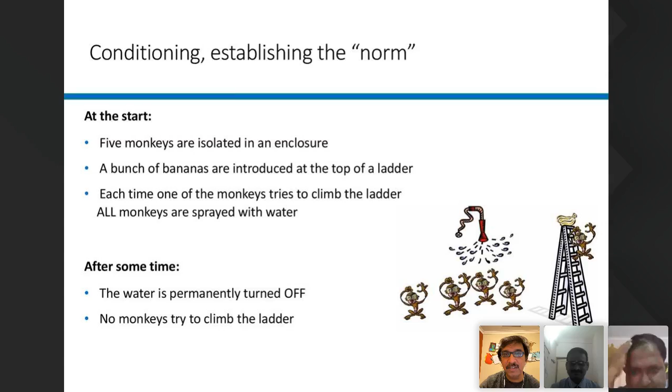They established the norm. After some time, they completely stopped the water spray, and no monkeys tried to climb the ladder, because they had a norm that if I climb, I'll be sprayed with cold water. Then proliferation. Proliferation is rapidly expanding the norm. So what happened? They replaced one of the monkeys with a new monkey. The new monkey tried to climb the ladder to get the banana.

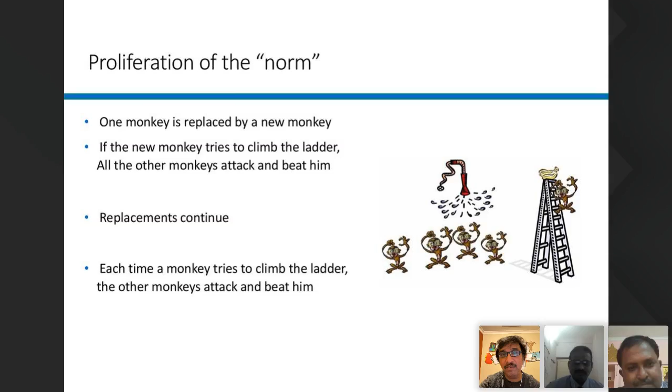All the other old monkeys attacked and beat him up. So the replacement continues—they replace the second monkey with a new one, the third monkey with a new one, and the fourth monkey with a new one. The replacement continues, and at some point all 5 old monkeys have been replaced with new monkeys.

Whenever a new monkey tried to climb the ladder, the old monkeys would attack and beat him. So what is the result of following the norm? Like this, the norm was set and the norm was expanded.

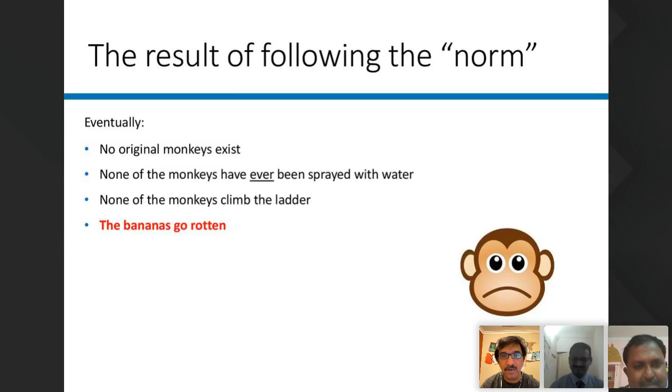And what if you keep following the norm? None of the original monkeys which had water sprayed onto them existed anymore—all were replaced. So the new monkeys were never sprayed with water, and none of the monkeys climbed the ladder, and the bananas go rotten, the bananas got spoiled.

So the message is, how do you avoid rotten bananas? See, we always fall into certain norms. We just get into our routines and we don't challenge ourselves. So if you don't want the banana to get rotten, always challenge the norm.

Always look for a better way, and most importantly, embrace new technologies and adopt a can-do attitude. In the industry, skill and knowledge is 30 to 40%, but what takes you forward is your attitude and your openness to embrace technologies.

In my father's generation, they start in one company and end up in the same company. That was the norm—people who are in their 60s and 70s now worked for one company throughout their life. In our generation, we switch companies every 2-3 years, move on. That's the norm now.

So the best thing to do is embrace new technologies, keep your mind open, have a good attitude, and prepare yourself for the future. That's the message I just wanted to share with everyone.

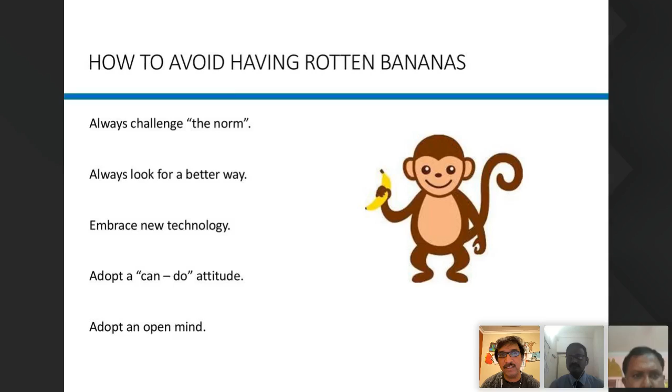And then we'll go to the overview of the oil and gas industry. I'm just using my iPad in parallel because it's connected to my mobile and the screen is a bit small, so apologize if I'm looking away from your screen.

Just a disclaimer, the oil and gas details discussed in this presentation are a very generic and simplified version. All the pictures and drawings are obtained from public domain web pages, personal collections, and from industry seminars.

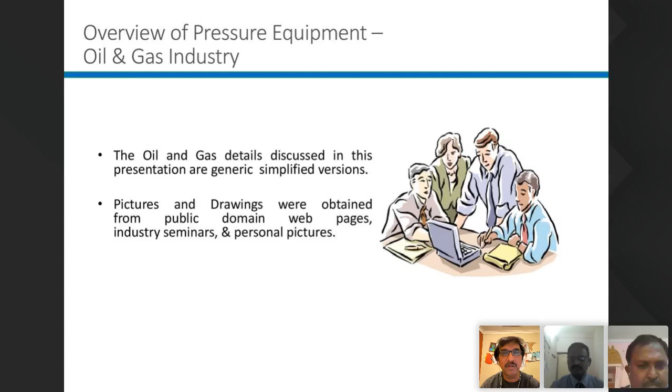I'm sure everyone is aware, you are all in the petroleum department, but I thought I'll just have a recap of what petroleum and natural gas are and how they are formed.

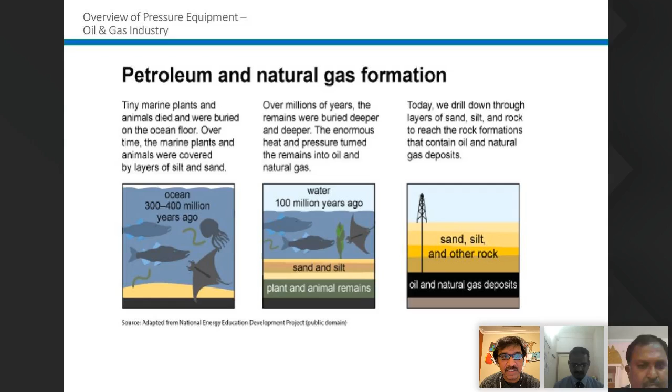Millions of years ago, tiny marine and animal matter died and got decomposed and buried deep inside the ocean. Over millions of years, sand, silt, and rock formed over the marine organisms. Due to pressure and heat from the overlying rock, the decomposed marine matter formed into gas—that's what we call fossil fuel. Today we drill through those layers of sand and silt and reach the rock formations and take out oil and gas.

What is the word petroleum? Petroleum is a Latin word—petra means rock, oleum means oil. Therefore it is called rock oil. Petroleum stands for oil from rock, or rock oil.

Petroleum is also often called hydrocarbon in any of its forms. We all know living matter is made up of hydrogen, carbon, oxygen, and nitrogen—majority 96%, with the rest 4% made up of smaller elements. So over the period of decomposition or decay, what remains of the fossil matter is 99% hydrogen and carbon. Those hydrogen and carbon atoms form a chain and become fossil fuel—that's why we call it hydrocarbon.

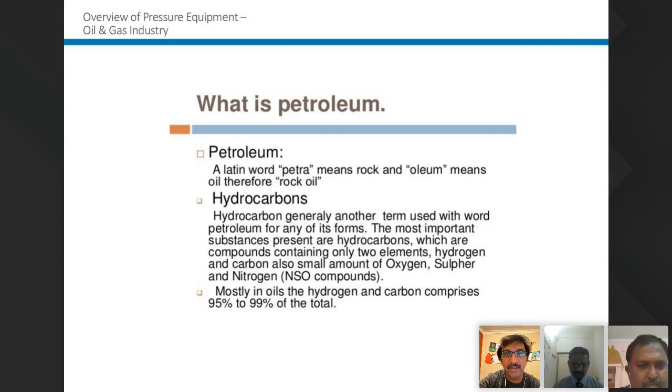Just a recap of what petroleum and hydrocarbon is. Then, oil and gas in our daily life—we use oil and gas to propel vehicles, heat buildings, and produce electricity. In the industrial sectors, petroleum is used to derive so many industrial compounds like plastics, polyurethane, and solvents.

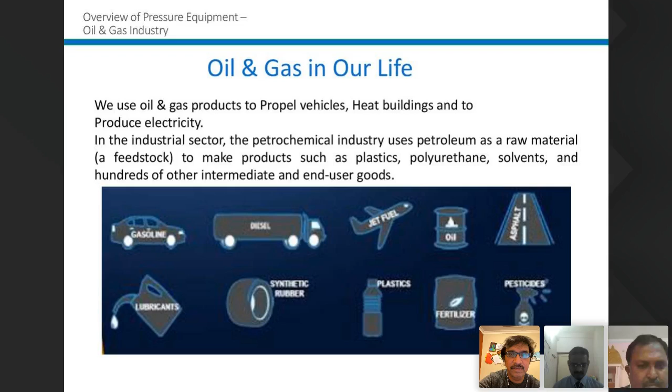Oil and gas characteristics: typically, oil and gas projects involve large investments, reaching billions of dollars. There is a project in Australia which we completed a few years ago.

It's spelled Gorgon—Gorgon, Gorgon. If you have time, please Google it. The cost of the project is $55 billion. It's the second most expensive project in the world, next to the International Space Station. So when you talk about investments, it's really large.

These are all called mega projects, mega oil and gas projects, LNG plants. A typical large project would cost around $8 to $12 billion from exploration to end of processing. Usually projects could be of scale $2 to $3 billion. So we're talking about billions of US dollars, 1 billion US dollars being 6,000 crores. And these projects are high risk in all aspects: people safety, environment, investment, and reputation.

I'm not sure how many of you are aware of the 2010 oil spill. In 2010, BP's platform in the Gulf of Mexico had a big explosion. One of the rigs exploded and caused a massive oil spill. It's the most disastrous event in oil and gas industry history. A movie has been made on that disaster, Deepwater Horizon. If you have time, please watch it, it's a very nice movie.

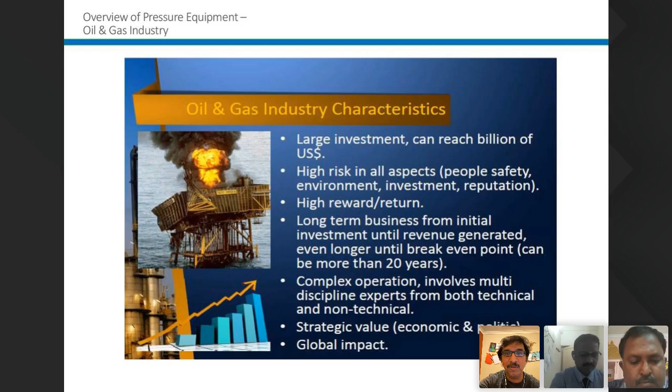I've got a small sketch of oil and gas industry sectors. Usually we divide the sector into 3 streams: upstream, midstream, and downstream. Upstream is about exploration and production - they use seismic technologies to figure out where the oil formation is, and they drill and bring the oil from subsurface to the top surface, or from the deep sea to the top of the sea. That industry has a small processing facility associated with it, and it's called the upstream industry - basically finding the oil and bringing it to the surface.

Then the second part of the industry is midstream. Not essentially every time is the oil field near a refinery plant - sometimes it's far away, like 70, 80 kilometers from the shore, or far away in a desert. So you'll have to bring that explored and produced oil for further processing to a refinery. If you see a picture of this sector, you'll see oil tankers that carry oil explored in the deep sea, say 100 kilometers from the shore, and bring it in tankers to the shore to download at a refinery for further processing. So that sector, transportation of oil from the place of exploration to the refining place, is called midstream industry - it's more of logistics, tankers and pipelines.

And the downstream industry is where the actual petroleum refining happens. This is where you get all the petroleum products, basically all the refineries, and further going downstream, you get a petrochemical industry or chemical industry. The end product is the petrol pump, where a common man gets access to petrol or diesel. This is an overview of the oil and gas industry.

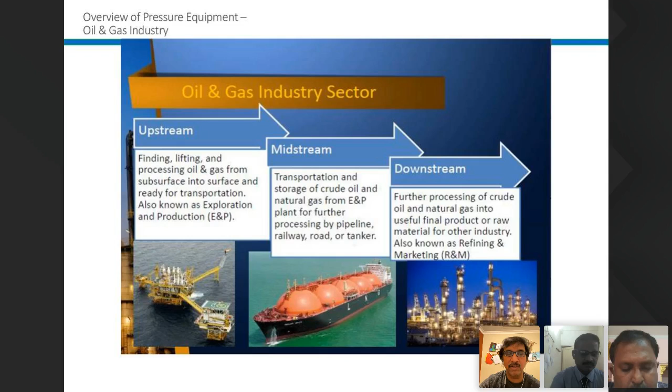Let's see how much oil is being consumed per day across the world - 98 million barrels is the consumption per day across the globe. I would say 45% of oil is consumed by America, China, India, and Japan. The rest, 55%, is consumed by all other countries put together.

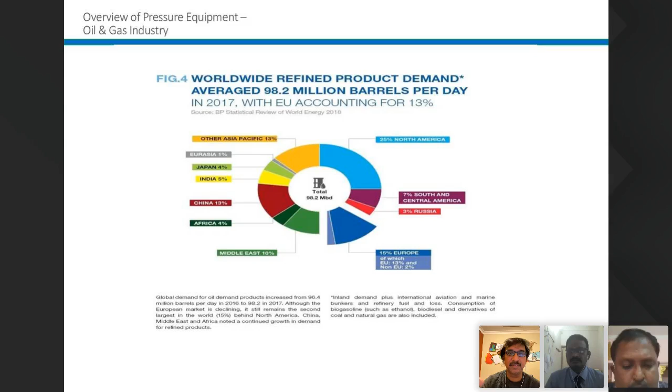Let's see who consumes the most oil. 42% of consumption of 98 million barrels is by light vehicles, that is cars and motorbikes, you and me driving across the roads. We are the major consumer of oil. 30% is by industries for electricity generation or other industrial purposes, and 20% is by trucks.

So you can imagine what COVID has done to the oil and gas industry. You would have heard oil price went negative because the 42% who drive were locked inside their rooms and nobody traveled on the road. So oil demand went so low and the price went down. We are the major consumer, light vehicles are the major consumer of the oil and gas industry.

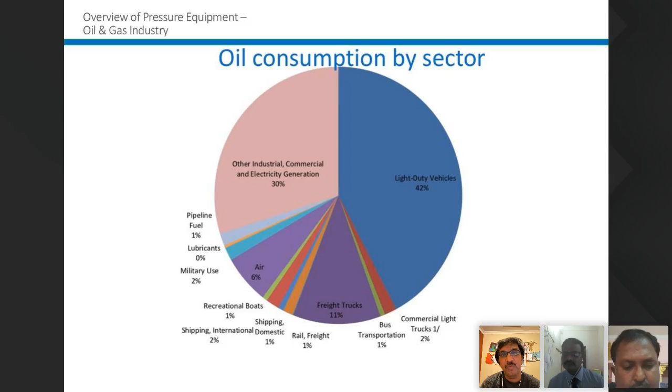The biggest companies in oil and gas, the number one company based on the 2019 report, is Sinopec, a Chinese company. Look at the revenue, it's $432 billion. That's the amount of revenue the big oil companies make.

They are all called IOC, integrated oil companies. They own upstream, midstream, and downstream. The major companies are Sinopec, Dutch Shell, you might have seen Shell petrol pumps, Saudi Aramco, BP, Exxon, Total, and Chevron. These are the major companies across the globe.

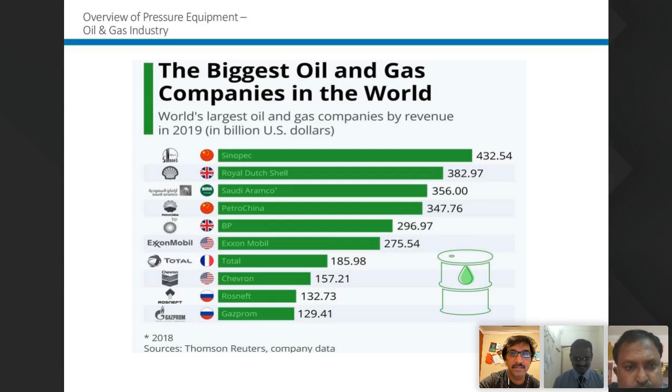Now I have a very simplified version of an oil and gas facility. I picked an upstream oil and gas separation unit, and this is a very basic schematic. On the leftmost side you see a production manifold, and the pressure coming in is around 200 bar. That's not the pressure in every case, it depends on the well pressure and temperature. For this instance, we've picked 200 bar and 100 degrees centigrade.

The production fluid, when you explore, comes as a three-phase oil, gas, and water mixture at 200 bar, 100 degrees centigrade, and it goes to the first equipment, called a production separator. This is where the gas, oil, and water mixture is separated into three different streams.

Let's take the oil line. At the end of the separator you see a thick black line going out marked as oil. When the three-phase mixture comes inside, because of density difference, and with special inlet devices, it separates into gas, oil, and water. Because of density difference, gas goes to the top, oil and water fall down. You'll see more detail in later slides.

I'm just quickly picking up the oil line. Oil first gets separated in the first phase separator and then goes to the low pressure separator again, which is a repeat of the first step. Further oil-gas separation happens there, and the oil is taken out. To transport crude over long distances, it has to be kept at a specified pressure and temperature, so you put it through a heat exchanger and then a pump to push it through long distances, and the oil goes out.

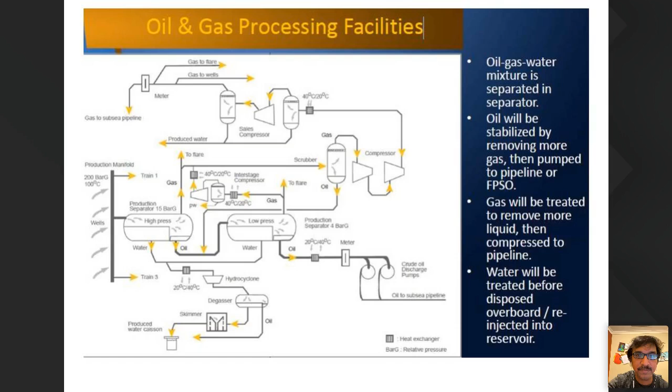Then, overview of pressure equipment. So what is pressure equipment and how does it look? Pressure equipment is a container. It is designed to hold gas or liquid at a pressure higher than atmospheric pressure. It has no moving parts inside. It's basically a cylinder designed to hold a pressure of, say, more than 1 bar gauge. Atmosphere is 1 bar, so anything stored at more than 1 bar gauge is called a pressure vessel.

It's a container basically, but it has a lot to do in terms of design, fabrication, inspection and testing. It can be of two orientations: one is vertical and the other is horizontal, basically flipping the way you support the equipment. A pressure vessel can theoretically be made in any shape, but industry usually limits it to a cylindrical shape. The cylinder is called the shell in industry terms, and the end caps are called heads. End caps come in spherical or elliptical shape.

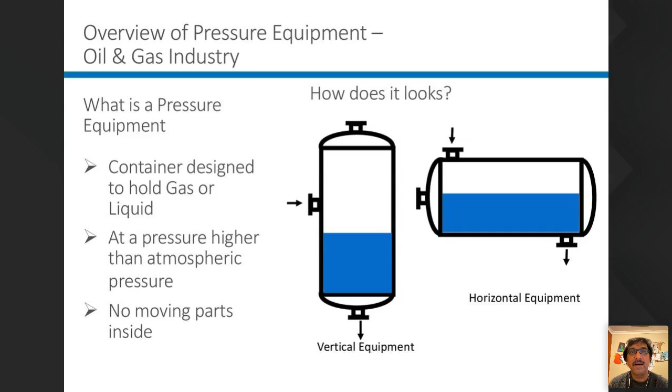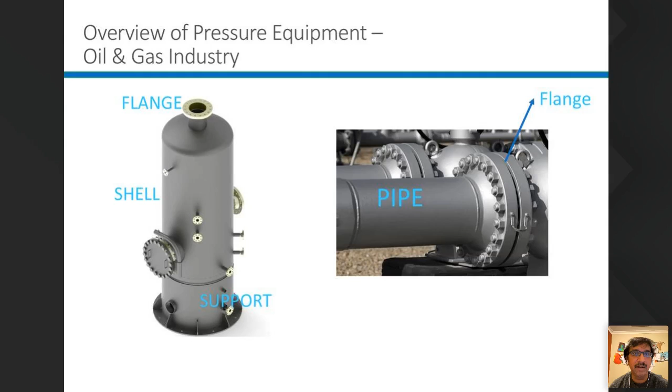Usually the pressure ranges from 1 or 2 to 300 or 400 bar, depending upon your well fluid inlet condition. And yeah, this is a very basic overview of pressure equipment. I thought I'd have a small 3D picture of a pressure vessel, the vertical one and the horizontal one. The fluid comes in and goes out through a pipe connection, and flanges, which are circular plates with bolt connections, are used to connect a pipe to your equipment, through which you transport liquid in and out of the vessel.

This is a sketch of a horizontal vessel. If you see the end side, it's called an elliptical head, 2:1, the ratio of the elliptical head. And those thick lines are all welds, which are used to attach the shell and head together.

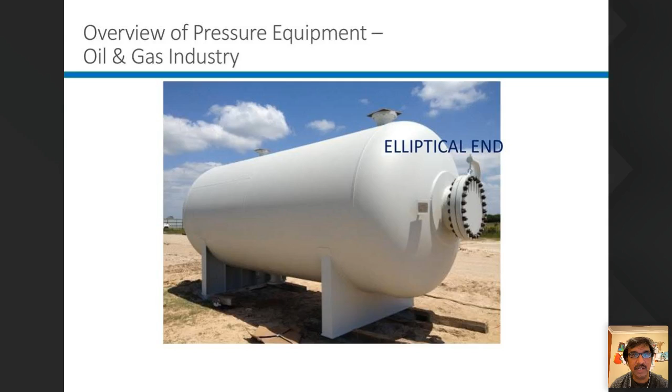So what's the significance of pressure equipment? The equipment operates at higher internal pressure. A lot of energy is stored inside the equipment. The higher the pressure inside and the bigger the size, the higher the stored energy. In the event of rupture or any failure, the extent of damage or disaster is huge. Pressure equipment safety is imperative in design.

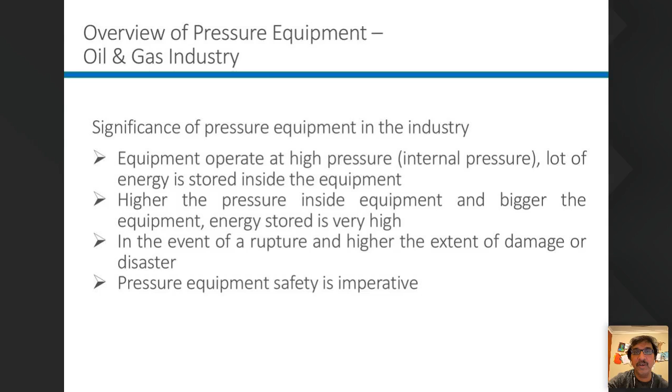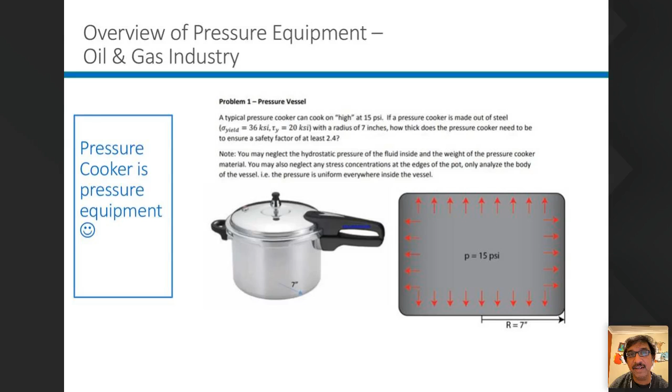Let's see this one, a small exercise. A pressure cooker is also pressure equipment. So how would you find the thickness of a pressure cooker which operates at 15 psig? In the industry, a pressure cooker cannot exceed 15 psig. That's the norm. So if you have to design a pressure cooker of 15 psig, with a plate material of 20,000 psi and a diameter of 14 inches, please give it a thought and see how you can design the plate thickness so that it can contain 15 psig pressure. We'll come back to this later.

We all think a pressure cooker is the simplest equipment, but home pressure cookers do explode. A woman in India was permanently blinded in her eye after a pressure cooker exploded. The full extent of injuries was not known until the CT scan was done. When they did the CT scan, they found that the valve, the one which pops out when pressure builds inside, had lodged deep inside her skull. She had to undergo surgery to remove it. Fortunately, she was saved, but she lost her eyesight.

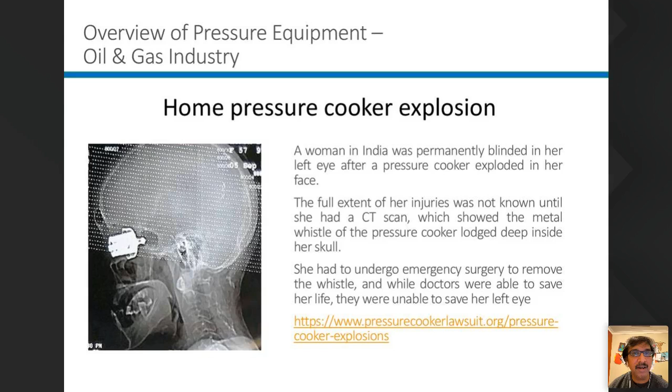If you go to the website link there, you will find many cases being launched against pressure cooker manufacturers across the globe. We are talking about a small cooker of 5 to 8 liters capacity with internal pressure less than 1 bar. So be aware, such low volume, low pressure equipment can cause a dangerous projectile. Then imagine what would happen with industrial equipment operating at 1 bar to 300 bar gauge with volumes of thousands of liters. It is a disaster if any of this equipment fails.

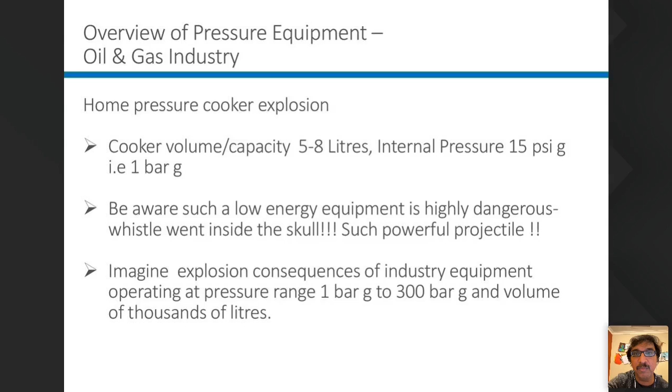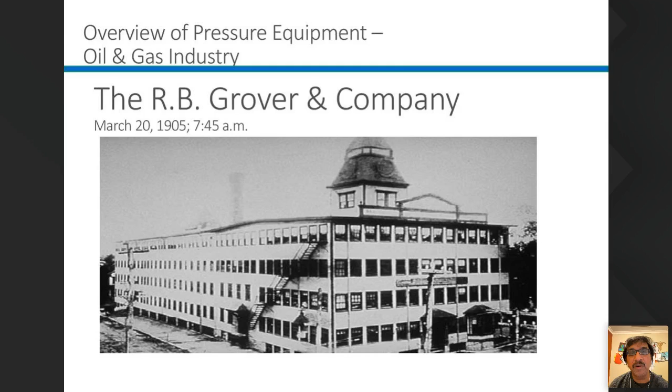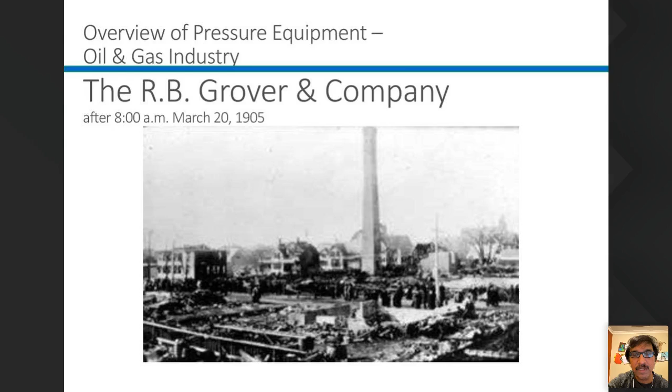Prior to this incident, all the pressure equipment, all the boilers were made based on individual skills of engineering assessment. They used to do their own engineering calculations. There were no regulations or guidelines for design of boilers. It was all finally up to the individuals, how they design and how they fabricate it.

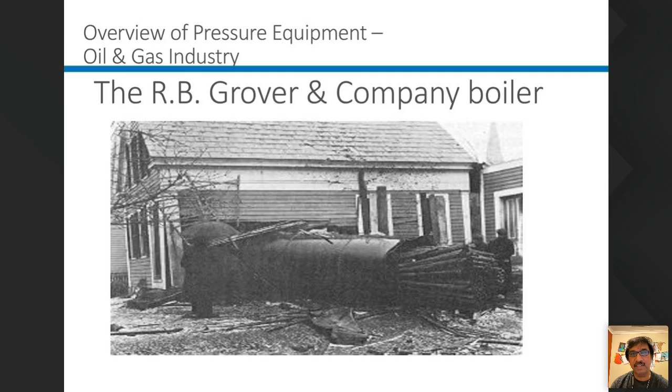So this incident really made a huge issue in the US, and they all recognized the need to have a proper code, code in the sense of a rule book, for the design of pressure vessels and boilers. So they approached ASME, the American Society of Mechanical Engineers, to come up with a set of guidelines. And I think in 1911 or 1912, ASME came up with a set of guidelines for the design of pressure vessels, unfired pressure vessels and boilers. That's how this ASME came into existence.

ASME is the book which we use in industry for the design of pressure vessels and nuclear plants. There are so many rule books in ASME. For unfired pressure vessels and boilers, we use Section 8, Division 1. Boiler explosions were common in the 1800s. Thousands were killed across years. This shoe factory incident was a major one that kicked off the requirement of uniform codes, and that's how ASME was created.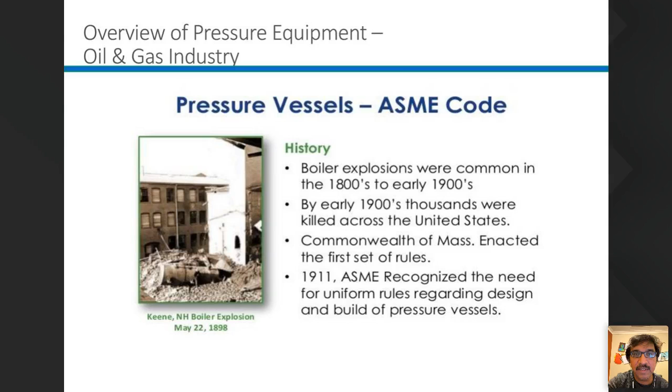So what does this ASME code define? They define the rules for design, materials, fabrication, inspection and testing requirements. It's a set of rules. The ASME code book for pressure vessels is over 1,000 pages. It's all defined rules. When we do a design, we simply follow the rules. There is no thought process or no questions asked, just follow the guidelines so that the equipment is delivered in a safe condition.

People have done a lot of research. They keep updating this ASME code once every 3 years or 2 years. So a big committee is working behind the scenes. On the industry side, we just follow the rules given in the ASME.

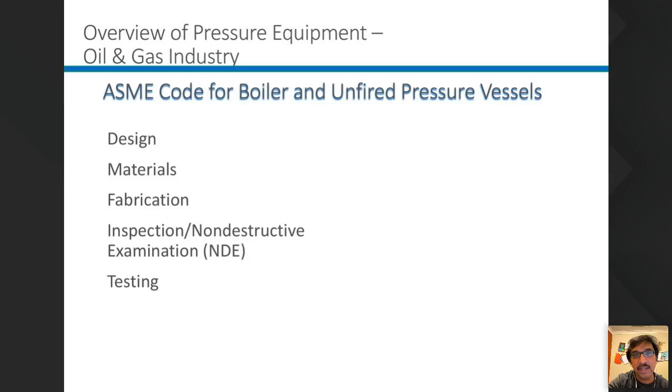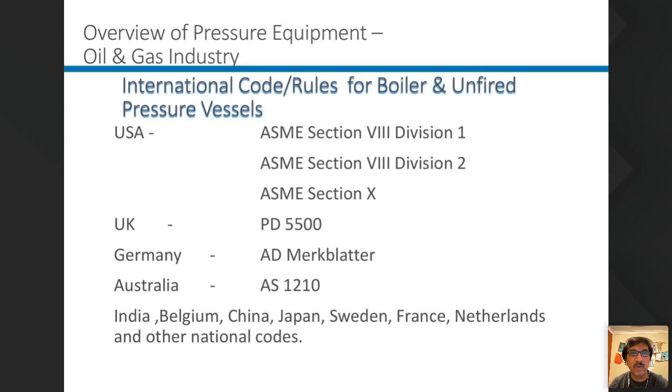So what are the international codes for boilers and unfired pressure vessels? In America, we follow ASME Section 8, Division 1 and Division 2. ASME has got multiple codes, but for pressure vessels and boilers, these are the two design codes which we follow. UK has got PD 5500, Germany AD Merkblatt, Australia we use AS 1210. Similarly, every country has their own pressure vessel design codes like Belgium, India, China, and Japan.

Vessel design. So we saw how disastrous a failure of pressure equipment can be, hence the need for the ASME guidelines. ASME made these design codes, and let's see what we do in the design of pressure equipment, what kind of loads we consider. Obviously, we have to design the equipment for the internal pressure, the pressure exerted by the fluid stored inside, and then external pressure.

When you drain the fluid from the vessel, sometimes it creates a vacuum, like when you take out water too fast from your water can, it pops in and out. That's okay with the water tank, but not with pressure equipment in the oil and gas industry. So you have to design for external pressure, self-weight, superimposed loads, and wind and earthquake loads. And more than that, fatigue, thermal design, and local loads from connected piping. Just have a brief idea of what design loads we consider.

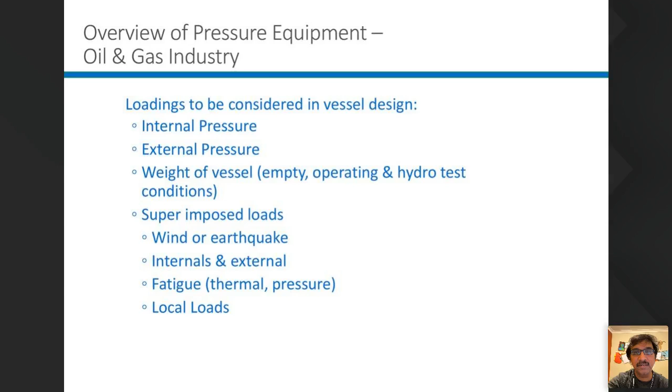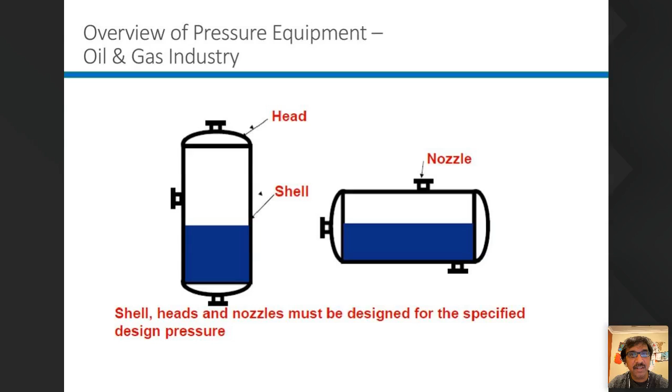And we saw this picture previously. The pressure components of pressure equipment are shell, head, and nozzle. These are the parts which are designed as per ASME. Let's take a small example. Let's take a cylinder of 48-inch ID. The intention is to find what the thickness of the cylinder should be if it has to withstand a pressure.

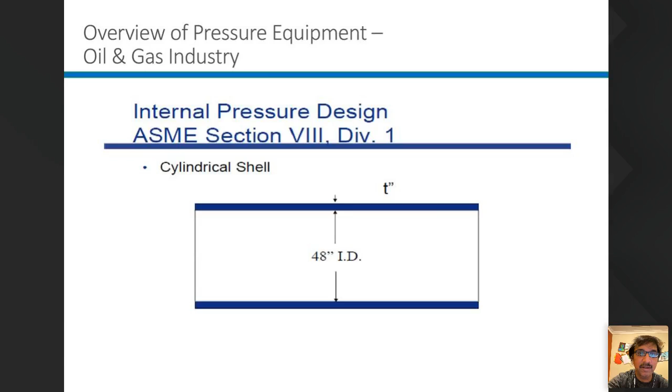And ASME gives this formula; UG-27 is the rule number. Just ignore that number. To find the thickness, the formula is T = PR / (SE - 0.6P) + CA. CA is corrosion allowance. As the fluid stays inside the container, it starts eating the material because of its corrosivity. So you always add some corrosion allowance, and 0.6P is a correction factor.

Leaving that out, T boils down to PR / SE. That's a very familiar formula. It's like hoop stress. Hoop stress is PD / 2T. So ASME has taken that PD / 2T and added a correction factor based on their analysis, and then added a corrosion allowance. So basically, the ASME formula is derived from hoop stress. Hoop stress acts on the cylinder's longitudinal joints, which see the most stress.

And if I go back to the previous slide, there is something called E. E is the joint efficiency. That's determined by what type of joint. Joint, in the sense like you roll a cylinder and weld it, right? So the welding might have some defects or it might have some porosity. So unless you do a complete thorough analysis of the weld, you'll have to add a safety factor in the design. That's what the joint efficiency is all about.

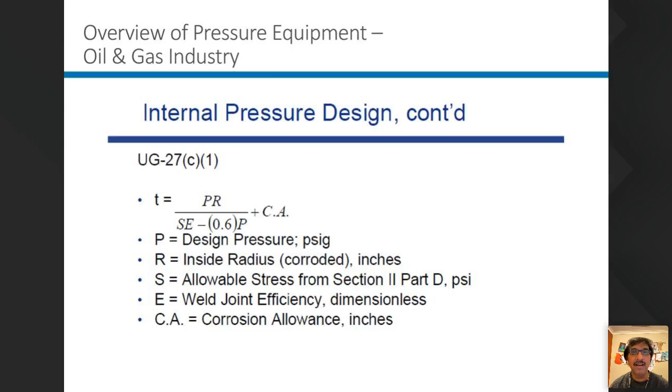After doing a welding, if you do a complete NDT and make sure 100% the welding is perfect, then E can be 1. If you don't do any NDT, then E can be 0.7. Basically, if the E goes low, 0.7, then the thickness goes high. Basically, they're building a margin in the thickness by lowering E values.

So let's take an example, work out shell thickness. The plate material is 516 grade 70. It's an industrial terminology for carbon steel plate with 70,000 psi ultimate strength. And if I consider 500 psi as an internal pressure and spot radiography, it means I do random radiography, then the thickness is calculated as PR over (SE minus 0.6P) plus CA. Just feeding in the numbers here, we get thickness as 0.8473 inch.

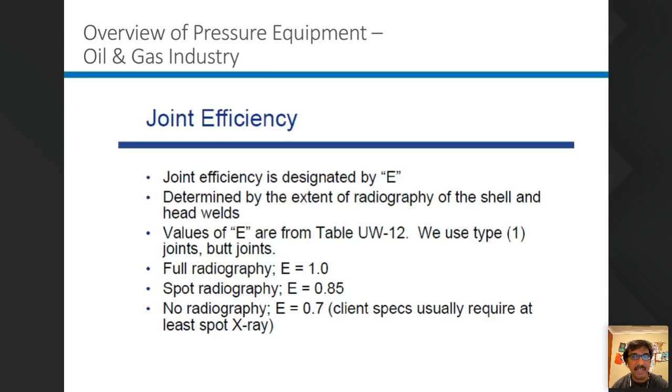So to contain a cylinder of 48 inch ID at 500 psig using a material of 70,000 ultimate strength, you need a plate thickness of 7/8 inch. So this is what we do in industry. When we get a project, when the client says, I want to design a production separator for 300 bar, a diameter of 3 meter by 8 meter length, we apply ASME formulas and calculate the thickness.

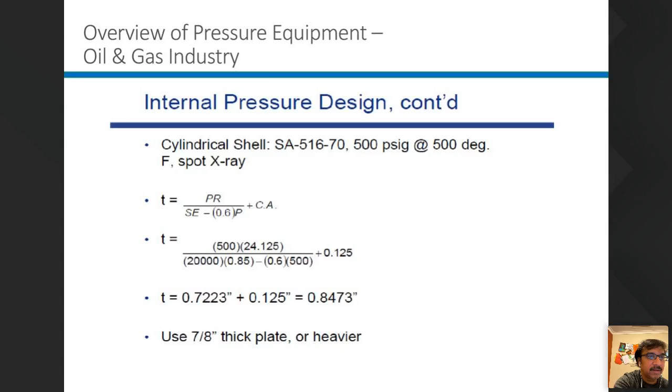And I'll quickly touch on the materials other than carbon steel. For the majority of material, the workhorse is carbon steel. Other than carbon steel, we use a lot of stainless steel: austenitic, ferritic, duplex stainless steel. The iron carbide diagram we study in college, this is the place where I find it applied largely. And also we use non-ferrous materials: aluminum, titanium, chrome nickel alloys. These are widely used industrial materials for pressure equipment.

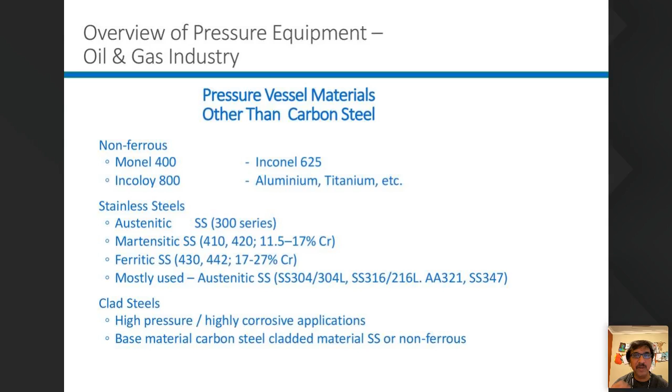And there is something called clad steel. This is basically a combination of carbon steel with an overlay of corrosion resistant alloy. It can be stainless steel or any other CRA material. These are the types of materials that we use in industry for fabrication of pressure equipment.

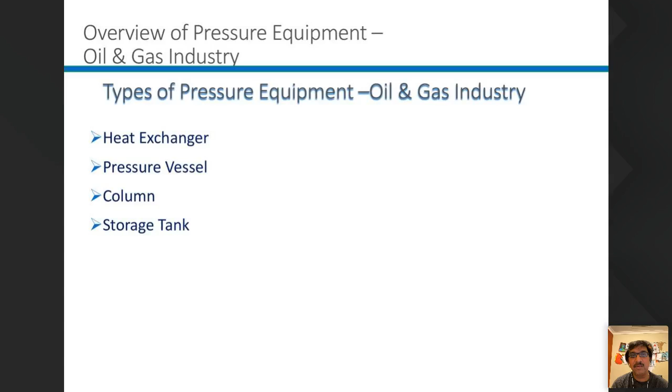And now, pressure equipment in the oil and gas industry. There are many types, but I just picked 4 majorly used types: heat exchangers, pressure vessels, columns, and storage tanks. Storage tank is not a pressure equipment, but I just included it because they're a group of equipment which are widely used. They do have a certain pressure, less than 1 bar, but technically they are not pressure equipment.

So what are the functions of this equipment? Heat exchanger is used to evaporate and condense. Basically, it's for heating and cooling. Pressure vessel can be a separator. Like previously we saw, an oil and gas mixture comes in, and a separator is used to separate the mixture into 3 different streams. Scrubber to knock off liquid in the gas stream. Filter, if you want to filter any debris that comes along with the well fluid, is again a pressure vessel, but it has specialty internals to filter.

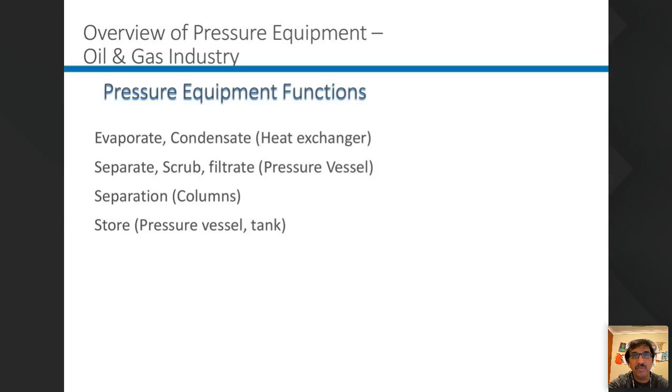And then columns, these are distillation columns. These also do a separation, but separation of products not by density difference, basically by boiling them and taking them out. And then the last is storage: pressure vessels and tanks. It simply stores, nothing much.

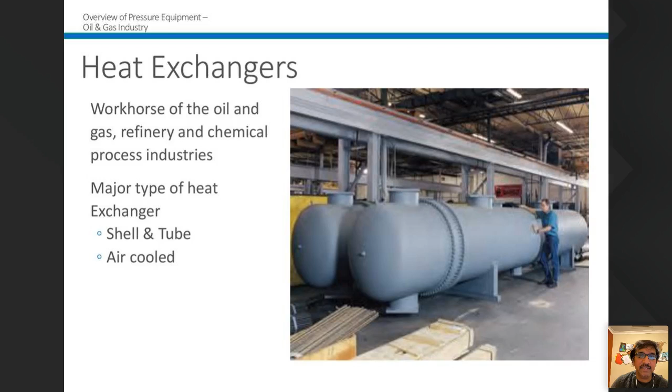Heat exchangers. They are the workhorse of refinery and the oil and gas industry. There are plenty of varieties of heat exchangers available in the industry. I'll just pick two of them: shell and tube and air-cooled exchanger. Again, a heat exchanger is also pressure equipment. The shell is designed to ASME code, or depending on location: if in US, ASME code, if in Australia, AS1210 code. Basically, it's a pressure equipment design.

In addition to that, we also have a couple of standards. API stands for American Petroleum Institute. They have a couple of standards, and TEMA, Tubular Exchanger Manufacturers Association. These are all standards used for design of heat exchangers. Basically these standards say how to design, select the material, fabricate, inspect, test, and ship the equipment. Basically, these are all guidelines used in the industry.

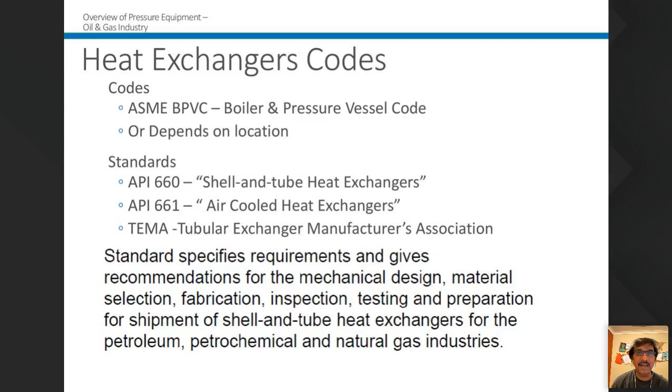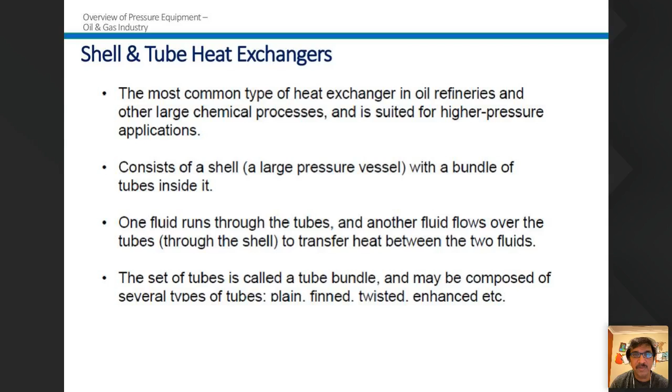What is a shell and tube exchanger like? It consists of a shell, a large pressure vessel with a bundle of tubes inside it. One fluid runs through the tubes, and the other fluid flows over the tubes, thereby exchanging heat between the two fluids. The set of tubes is called the tube bundle. There are many types of tubes, like twisted tubes, plain tubes, fin tubes. Most of the time, we use plain tubes.

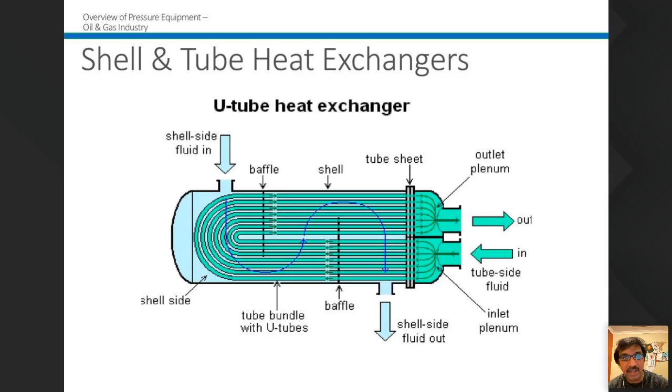Just a three-dimensional view of this similar sketch. I've got a video, let me see if I can play that.

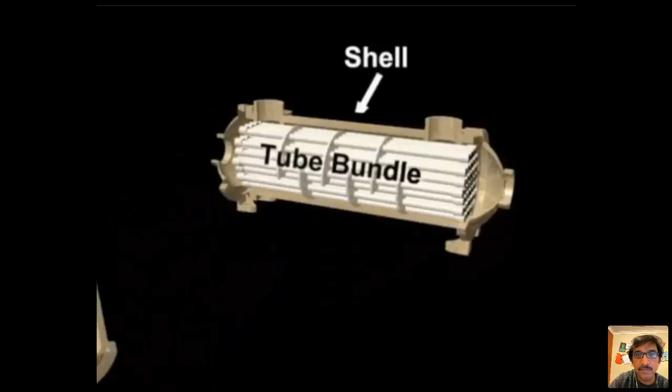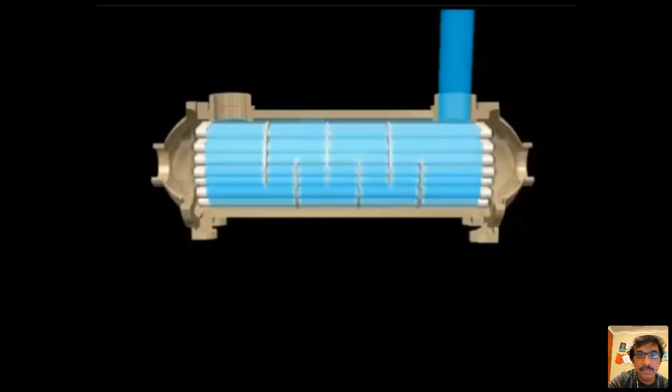A shell and tube heat exchanger consists of a bundle of tubes placed inside a larger tube, which is called the shell. The tube fluid, usually the process fluid, flows through the tubes in one direction. The shell fluid, usually the utility fluid, flows through the shell and around all of the tubes in the opposite direction. This is called a counter current.

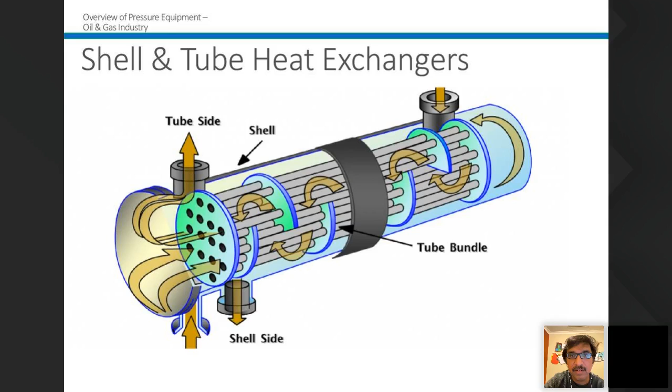I'm sorry, for some reason the video is not playing. I think I'll go back to where we were. Sorry, the video is not playing. Stalin, can you play the video? Can you give it a try? Video, sir? Hello? Video is okay. Yeah, can you try playing the video? I'm not able to play it. Yeah, I will try. Okay, thanks. Can we start the video, sir? Shell and tube heat exchanger demonstration, is that what you are looking for? Yeah. Yes. I'm not able to play the video. Stalin sir, can I start?

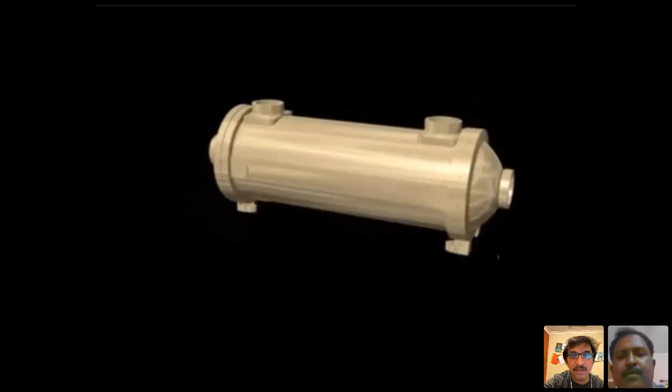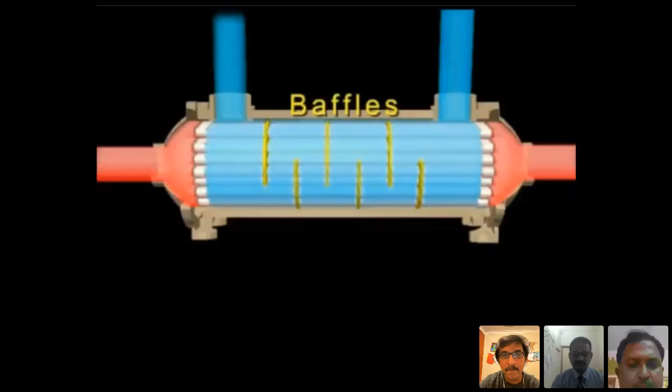Shell and tube heat exchanger consists of a bundle of tubes placed inside the larger tube, which is called the shell. The tube fluid, usually the process fluid, flows through the tubes in one direction. The shell fluid, usually the utility fluid, flows through the shell and around all of the tubes in the opposite direction. This is called a counter-current design. The shell contains baffles to support the tubes and repeatedly redirect the shell fluid across the tube bundle.

Okay, Guru sir, is it okay? Can I play another video? Air-cooled heat exchanger. Yeah, probably. I think I will go through the air-cooled exchanger slide and then we can try playing that. Okay, sir, thanks. Thank you. Okay, I'm sorry, the video is not playing. Please check it out on Google if you have time; plenty of videos are available. The video is still scrolling, sir, but it's not playing. Okay, maybe I'll go on to the next slide. Okay, sorry. Thank you.

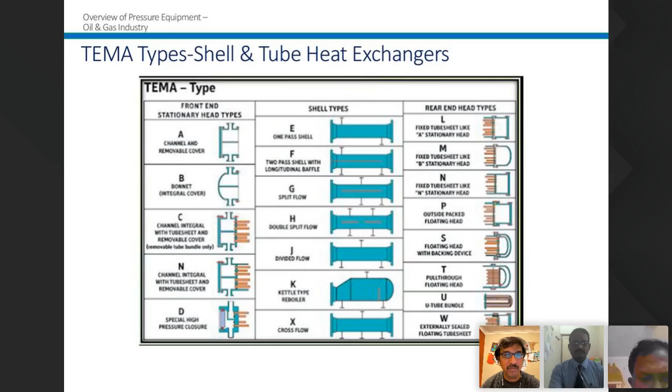And again, the picture which I showed is a U-tube bundle; there are plenty of heat exchanger combinations. You can see the front end, you've got A, B, C, D. It's like bonnet, channel, removable cover, fixed cover. It's all industrial configuration types. They call it TEMA, Tubular Exchanger Manufacturers Association. They have worked out so many options and put up what kind of heat exchanger you can fabricate for a particular service. It's basically selected by a thermal and mechanical engineer together.

Front-end design, shell type, single pass or multiple pass or split flow, whatever way you want to design the flow, you can design depending upon your service. Then rear end. So a combination of heat exchanger can be BEU or BEM or AES or AET. You can do this combination. Multiple combinations are available.

Again, this is more of an industrial selection guide. It's basically the selection is done by a thermal engineer who selects the design based on the process requirement and works with a mechanical engineer to figure out the difficulties that may arise during fabrication testing. And we work in iterations, go back and forth and select which is the best configuration for a particular service.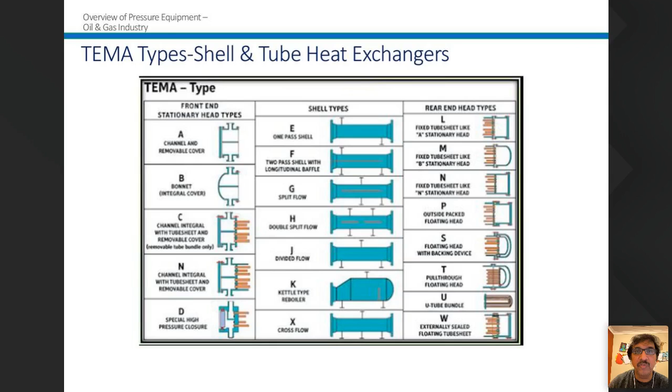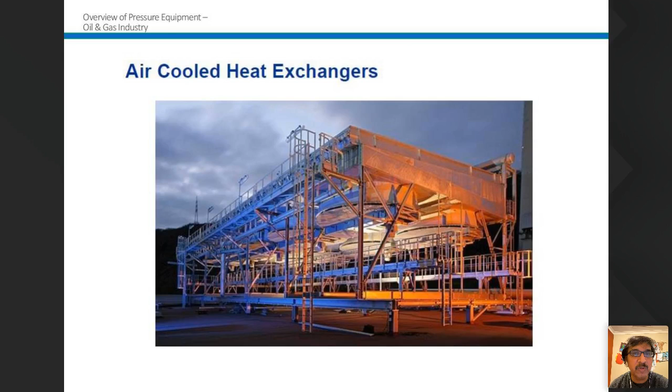The second type of exchanger is air-cooled exchanger. As the name implies, the cooling is done by air. When we don't have a cooling medium like seawater or tempered water in a plant, when the temperature crosses too low, they use air-cooled exchanger. That's the basis of going for air-cooled exchanger.

Guru sir, can I play the air-cooled heat exchanger? Yeah, yes, Stalin, thank you. Please, if you can play the video, please. Thank you.

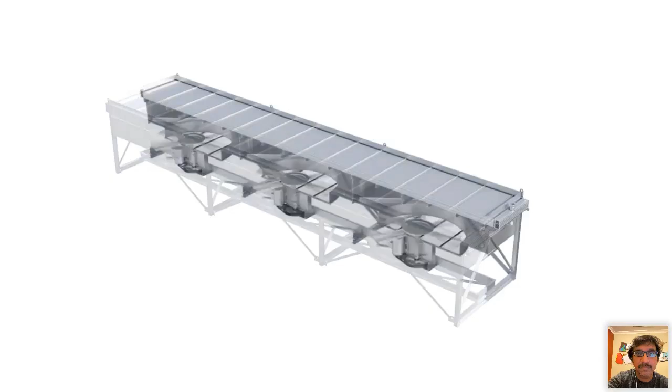This cross-sectional view shows the two key air cooler components, the bundles and the fans. Looking a bit closer, we zoom into the air cooler bundle. Here we see the hot process fluid entering the bundle, and as the process fluid moves through the fin tubes, the process fluid's heat is taken away.

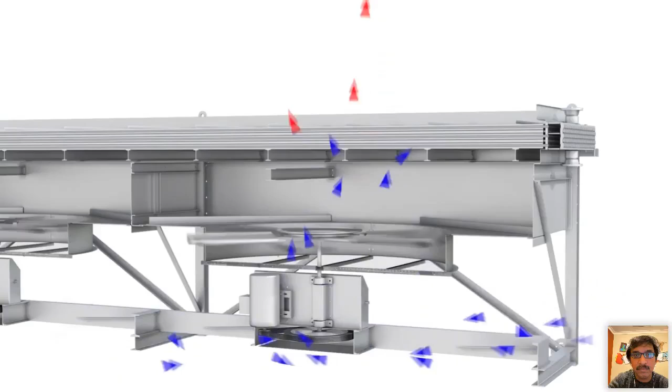The process fluid's heat is removed by using colder ambient air. The ambient air is directed over the fin tubes by fans. As the ambient air flows around the fin tubes, the air absorbs or takes away the process fluid's heat. This is just one of the many available air cooler configurations.

Okay, sir, you can continue. Continue this. Yeah, I think some issues with the video upload.

Okay, so this is how an air-cooled exchanger looks like. Shell and tube, the name comes from a tube bundle being inside a shell. In this case, the tube bundle is exposed to atmosphere, it's open, and it has got rectangular boxes at the ends, and the tubes connect both the rectangular boxes. If you see from the slide, the process fluid enters the rectangular boxes, called header, travels inside the tubes, takes a turn at the end, and comes back at the out, shown in red arrow, just below the blue arrows. That's in and out of the process fluid.

And there are big fans under the tube bundle. The fan pushes the ambient air through the bundles, and while the air travels through the bundle, it does heat transfer, thereby reducing the fluid temperature flowing through the tube bundle. The video would have been better showing how the fans operate. Sorry that the video is not playing. You can give a try later in Google and see how air-cooled exchanger functions. It's basically the flow of air through the tube bundle, pushed by fans.

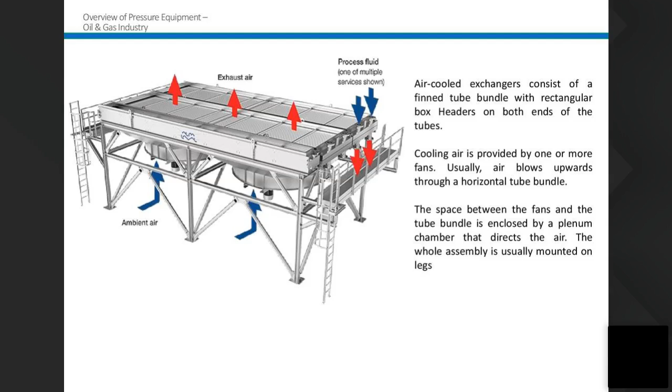Okay. The video is not playing. These are two types of heat exchangers I wanted to share today, but unfortunately the video is not working. Let's move on to the next type.

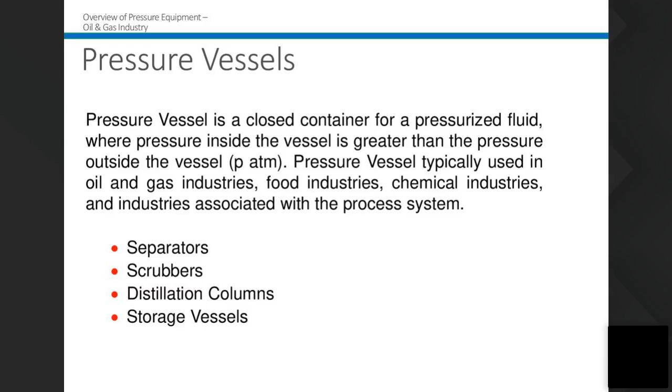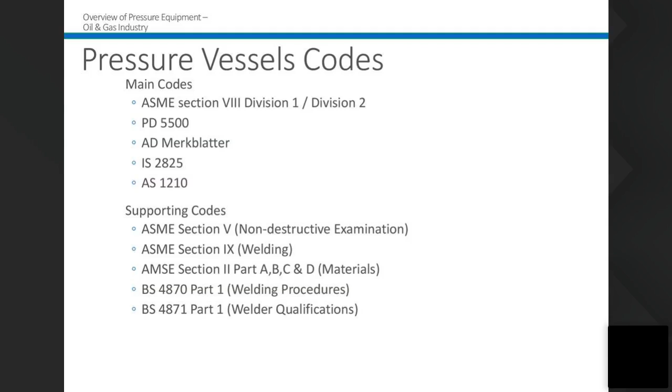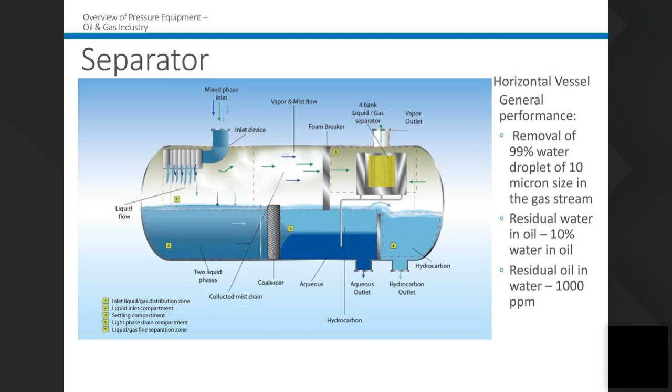The next is the scrubber. The scrubber, as the name implies, is to knock out water droplets from gas. The removal size is about 3 microns. When gas goes out of the separator, it is 10 microns. And just before going into the compressors for further compression, we still knock out the remaining water droplets in gas, and the performance expected is a 3 micron size water particle removed.

There are a lot of specialized vendors in the market, internal suppliers, again for inlet momentum breakers and demisting devices. So the vessel sizing is basically done based upon what type of internals you select and the residence time required. Once the internals are selected and the vessel is sized up, then the mechanical design takes over.

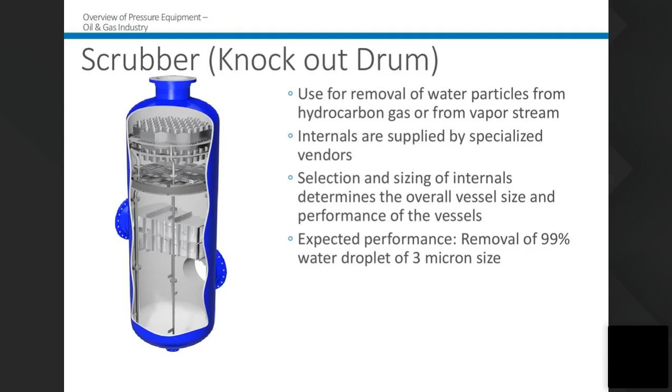The last one is a distillation column. This is used to separate two or more mutually soluble compounds in solution by varying the boiling point. The crude is fed at the bottom and it is forced to flow through the trays. I keep heating the crude at a temperature of around 20 degrees centigrade.

You get the LPG gas used in our cylinders. Keep heating - at 70 degrees you get chemicals. At 120 degrees you get petrol for cars. At 170 degrees it's jet fuel. The more you keep heating, you get different petroleum products.

This is one of the major equipment in the oil and gas industry, widely used in refineries. For the internals, I've tried to put a small 3D picture of how the internals look. Basically it's a combination of trays, as we call them, and then a set of packings inside.

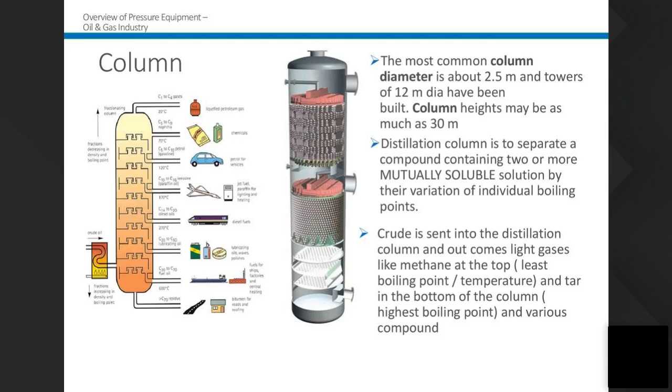Finally, there are storage tanks. The purpose of a storage tank - there is no process in it. It's basically where refined crude or product is stored. Some of the tanks might have a little bit of pressure inside, and they're designed by API codes, API 620 and API 650.

I think that's all I have today. Just tried to cover as much as possible in 1 hour about pressure equipment. If you have any questions, I'm happy to answer.

Very good, Mr. Guru. Yeah, thank you. One or two questions from the chat. Number one, what are the ways to prevent corrosion in the heat exchanger?

I would say the mitigations we can do for heat exchangers are either by selection of proper material, or by selecting the right design. That's why TEMA has a combination of rear end type, front end type, and selection of flow, like AET, AES. You'll have to see what fluid goes in there, whether crevice formation is possible, and if the fluid can cause crevice corrosion, then you'll have to select a different configuration of heat exchanger. So it's not a direct answer, but yes, you can mitigate corrosion by selecting proper material and proper TEMA type.